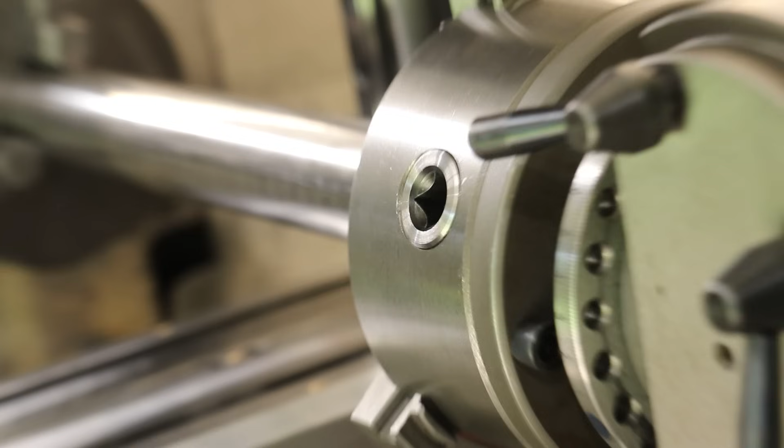So previously we made a dividing head attachment for the lathe. So this week let's put it and the vertical milling attachment to work. If you haven't seen the previous two videos, I've essentially replaced the tailstock with a dividing head. The goal here is simply to be able to hold parts in the lathe and also lock it in place and index it if necessary.

And after considering making some sort of spindle lock or dividing attachment, I thought the easiest, most simple way to do this was to replace the tailstock with the dividing head, which I already owned. All I had to do was make a bunch of standoffs to bring it up to the correct height.

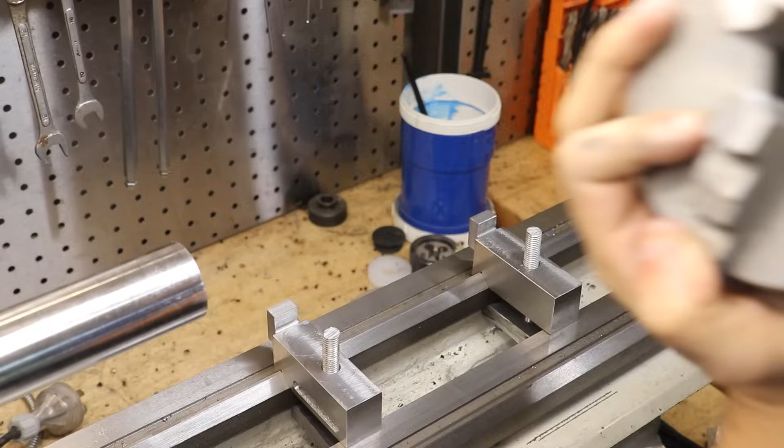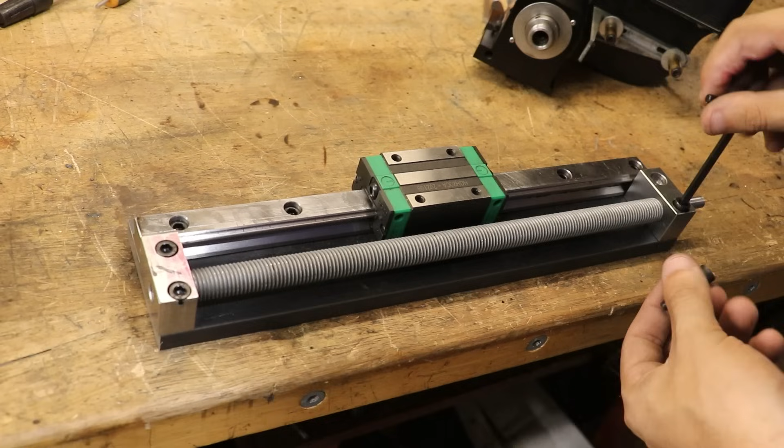The vertical milling attachment though is a bit of a different story. You'll see why this was necessary in a minute, but essentially all it is is just some threaded rod, a linear rail which I stole from an old CNC project, and a bunch of 1/2 inch metal plate which I've simply welded together and then bolted to the new cross slide.

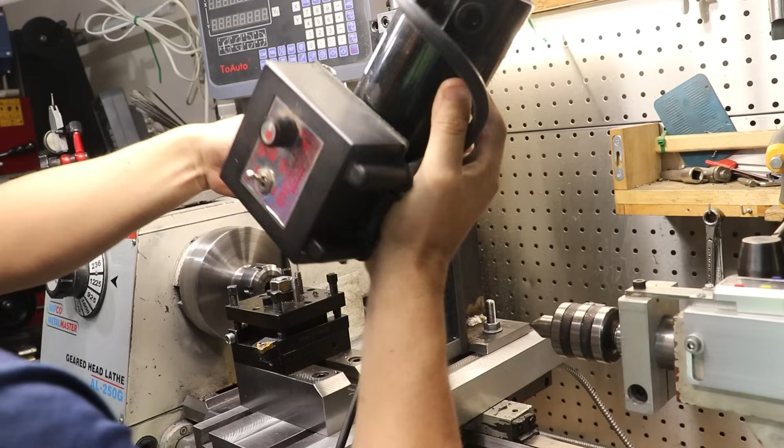It's not the most substantial piece of equipment that I've ever made, but given that it cost me almost nothing to make and this is a one-off job, it'll do the job just fine. So I guess at this point, let's talk about the reason why I've gone to the effort to make all of these things. And to do that, we need to go over to the mill.

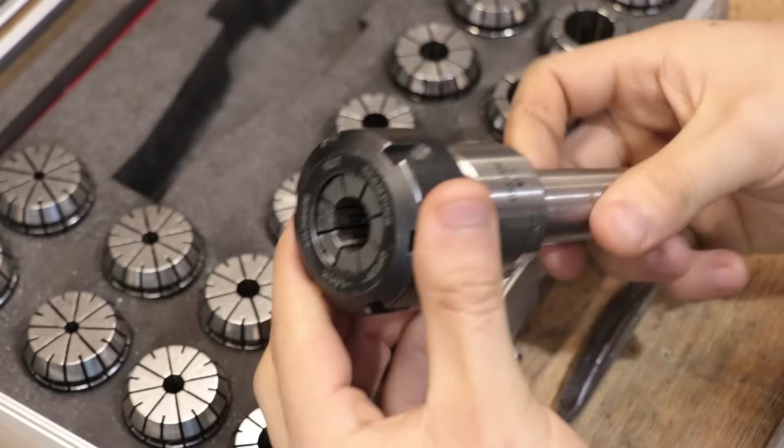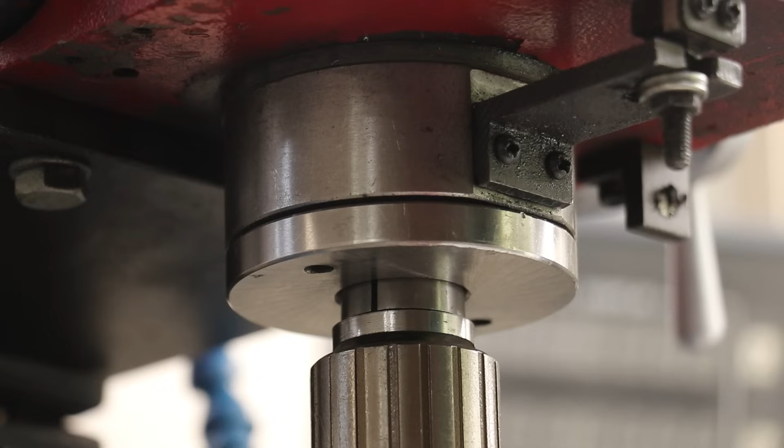Now something that I've said for the past 3 years is that one of the best things I did to this mill was stop using my Morse taper ER collet chuck and instead swap over to what I call the quick change mill tooling. Essentially they're just ER collets with a 20mm shank and they're all held in a 20mm Morse taper 3 collet. It just makes changing out tooling a lot easier and a lot quicker because all you have to do is change the tool holder rather than having to undo the nut, change out the collet and change out the tool. The upfront cost is a little bit more expensive, but it is well worth it.

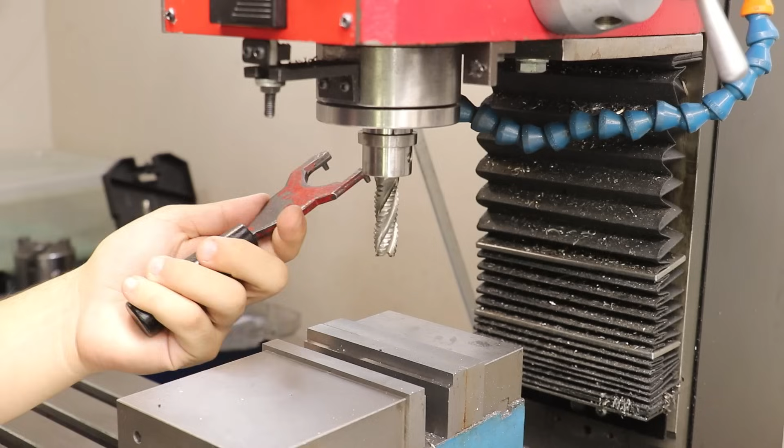Now whilst I do love this method of tool holding, the spindle wrench for holding the spindle in place whilst I undo the drawbar leaves a lot to be desired. Now I do want to point out that the method for holding the spindle whilst you undo the drawbar seems to vary a lot between different models and brands of milling machine. I've seen and used a few different designs, but by far the worst has got to be the one that they've used on this milling machine.

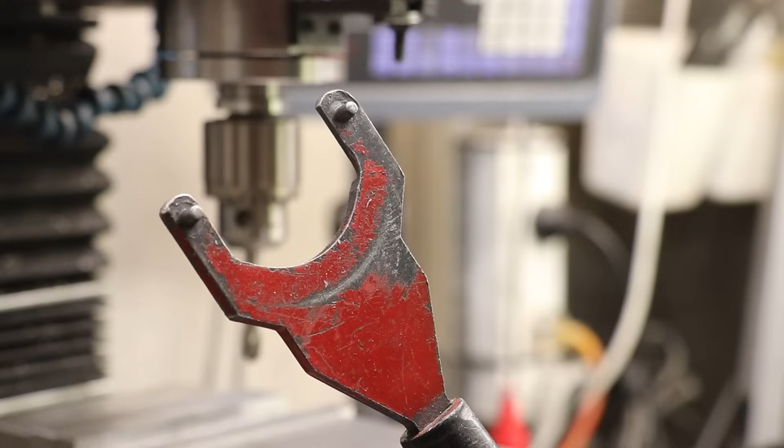Essentially you have a wrench with 2 pins that locks into 2 small holes on the bottom of the spindle and you use that to hold the spindle whilst you undo the drawbar. In theory it should work, but in practice there's so little room between the bottom of the spindle and the top of the flange, and there's so little engagement between the pins and the hole that it's very easy for the pins to slip out and for the wrench to slip.

And when that happens I can very easily hit my wrist on the tool. I can very easily graze my arm on the end mill depending on what type of holder, and I've also smacked my arm into the workpiece itself. Now I do want to stress that this isn't something that happens very often, but at the end of the day, this is just a numbers game.

You know, I change the tool in and out maybe 30 times in a good project, so times that out and maybe say I have a slip once every 200 or 300 changes. You know, that does start to add up over time. Again, I don't get hurt every time, but it's just a numbers game and something that I really wanted to fix for a very long time.

Now I think the most straightforward way of fixing this would be to add some sort of spindle lock. Essentially a pin that would locate into a hole on the spindle itself, and the spindle lock would be connected to either the milling head itself or the quill.

Now adding a spindle lock would not only make the mill a lot safer to use, it would also make using it a lot more enjoyable because it also means that I don't have to worry about finding the spindle wrench, because it seems to be one of those tools that I'm always losing. Now before I can add it though, I do need to get the mill pulled apart, just so I know exactly where the bearings are and how thick all the walls are, so I don't accidentally drill into anything too thin or too important.

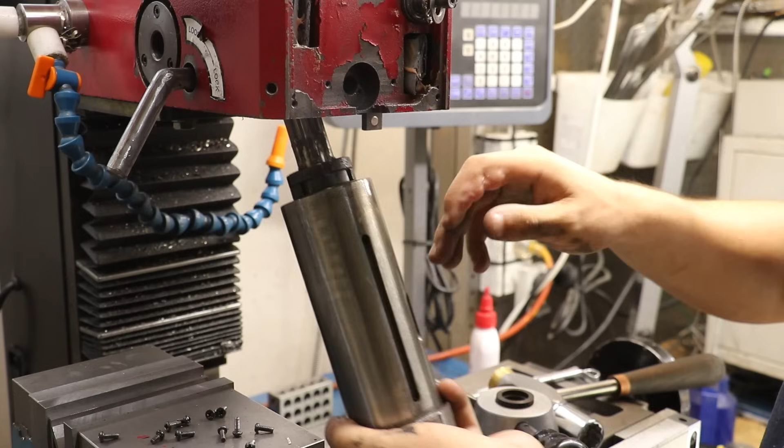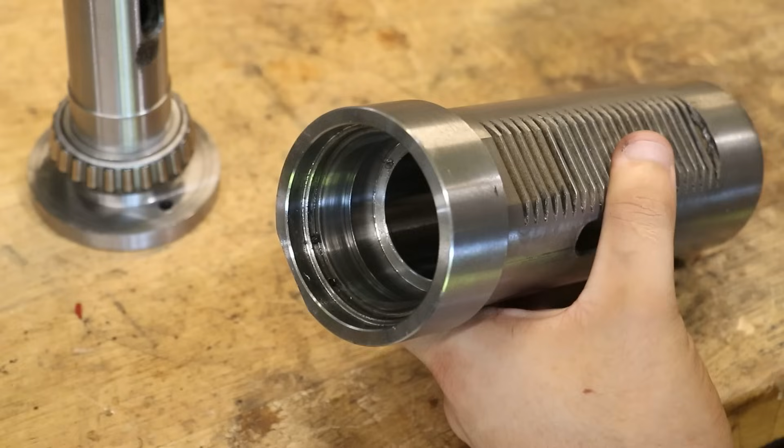Alright, so that's now the spindle and the quill pulled apart. Unfortunately though, the news is not good. I was under the impression that the bearings sat a lot further down in the quill than they actually do. It had been a while since I'd pulled the quill apart, so whilst I didn't exactly remember what it looked like down to the millimeter, I did remember the model of bearing that I'd used. So going off its height and the height of that bottom flange, I thought that I'd have about 15 or 10 millimeters of space to work with.

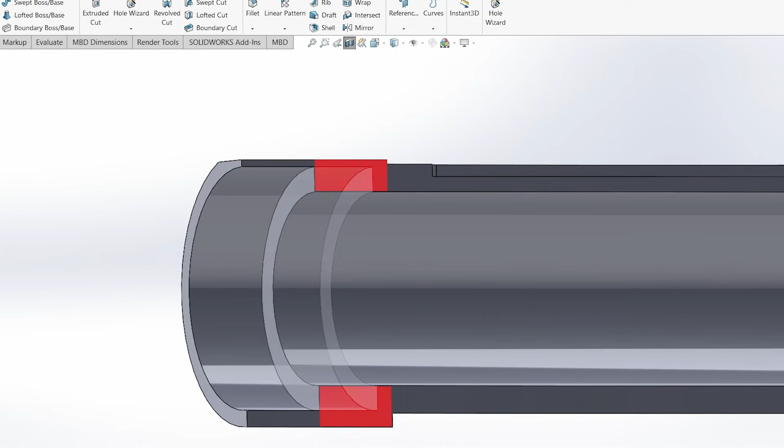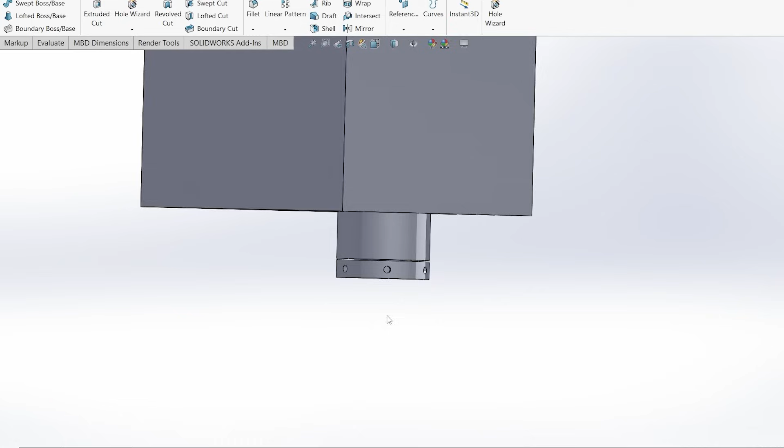Unfortunately, it sits a lot further back than I'd remembered, which means the amount of usable space that wasn't being taken up by the bearing was about 3 millimeters. Now yes, there was more space at the top to mount some sort of spindle lock, but I wouldn't be able to use it because I need that space at the bottom for the spindle lock body. The original design needed to be as low profile and as compact as possible because the pin needed to lock into that flange on the spindle, and it also couldn't be lower than the bottom of the spindle itself, otherwise it would risk crashing into workpieces. So unfortunately, at least as far as my first design went, that was the end of that.

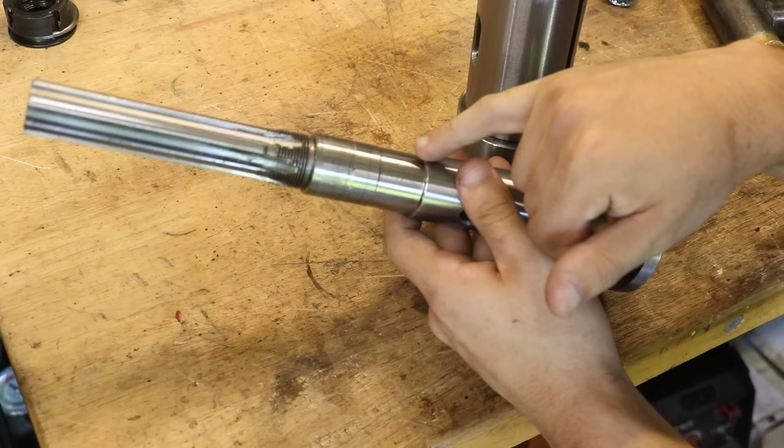Now after doing a bit of research online, I did find a few designs that use a pin that locates into a hole that's located closer to the center of the spindle. Now unfortunately, because I have a quill, it is going to complicate things a little bit because the quill also has to move upwards and downwards, which means I either cut a massive slot all the way down the side of the quill so I can use the spindle lock whenever I need to, or I can only use the spindle lock when the quill is fully retracted. Thankfully, I only use the quill when I'm drilling, and most of the time it is in the fully up position, so this shouldn't be a huge issue for me.

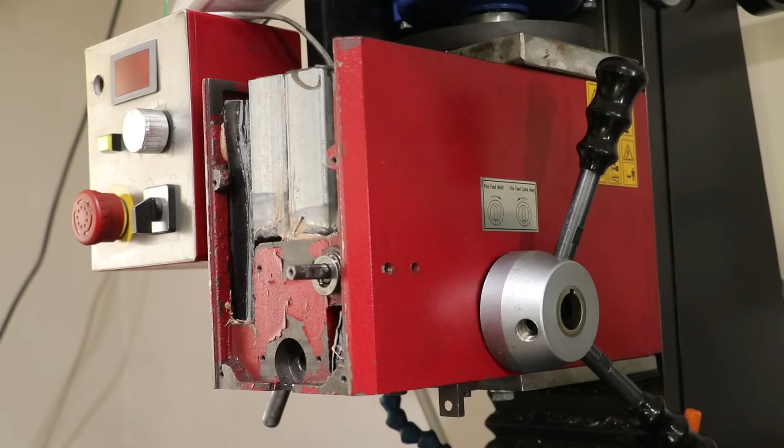So essentially what I'm planning on doing is having a spring-loaded pin that will go through the head of the mill, through a hole in the quill, and then lock into the spindle itself. Now that would be good, except at the moment, I don't currently have anywhere on the mill that I can install it. I can't really put it on the front because there is a really important alignment channel on the front that I don't want to interfere with, and I can't put it too far up because someone thought it was a great idea to install about 10 kilos of lead in the front of the head. I can't install it on the right hand side of the head because the handwheel for the quill is going to get in the way. I did think about remaking it with a different angle for the handles or maybe a different shape altogether, but I think there is a better way of doing this.

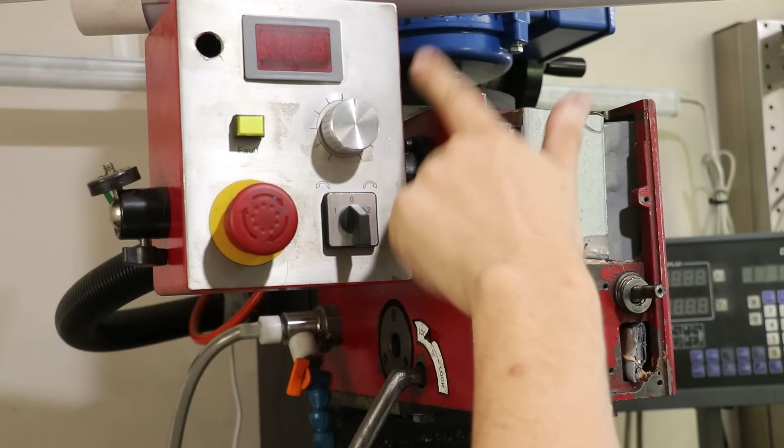Now unfortunately the left hand side isn't much better. There's the control box for the milling machine motor and also the handle for the quill lock. Funnily enough, there's probably even less space here than there is on the other side. But this is the side that I am going to choose because whilst I can't move the spindle lock location, I can very easily move the location for the motor control box. And by that I mean I'll just move it out of the way. It's only being held in by that plastic bracket, so I can easily remove that and just mount it somewhere else.

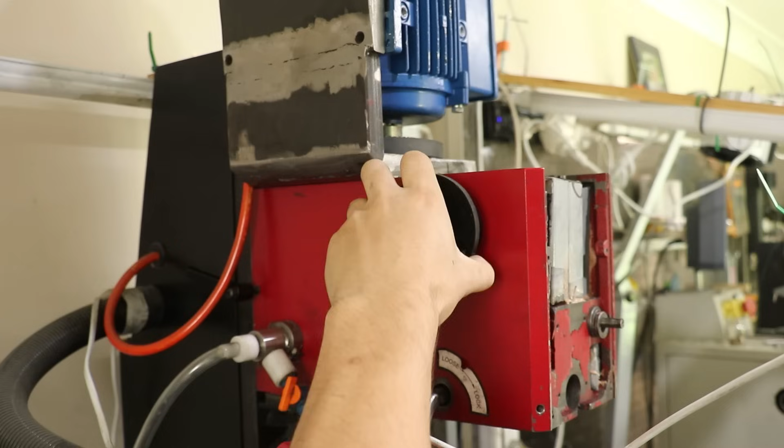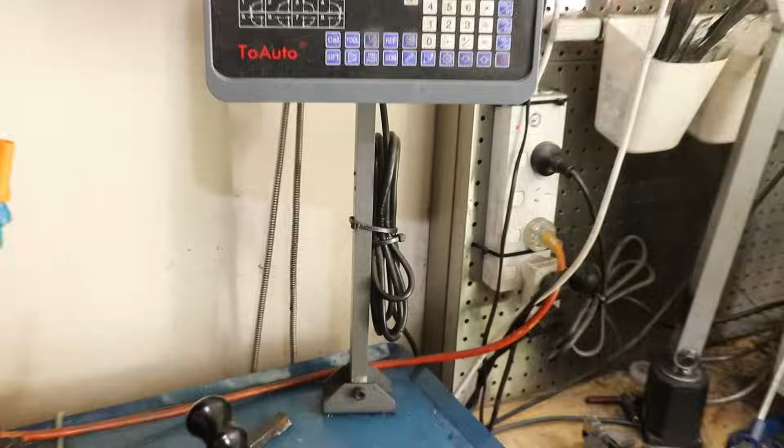So with it now removed, let's get it mounted somewhere else. I think the easiest way to do this is just to copy the arm and the mount that they use for the DRO. Essentially, I'll just make some sort of swing arm and mount it pretty much how they intended the DRO to be mounted in the first place. But instead of being a DRO, it's going to be a motor control housing. So the first thing I'll do is I'll quickly run up to Bunnings and grab a bracket and some aluminium extrusion, and hopefully try and make this work.

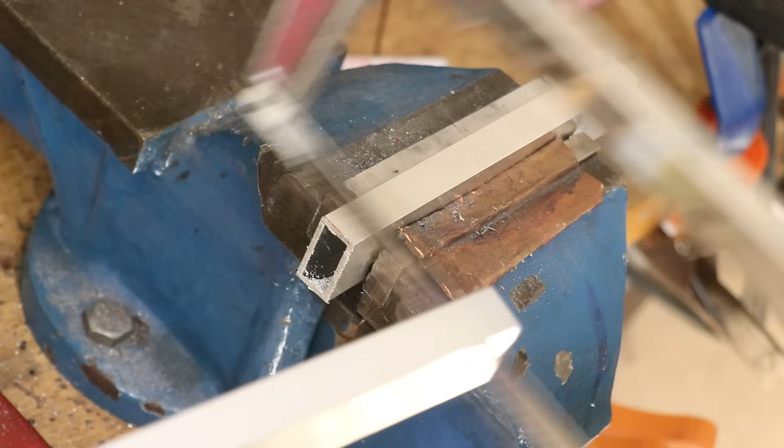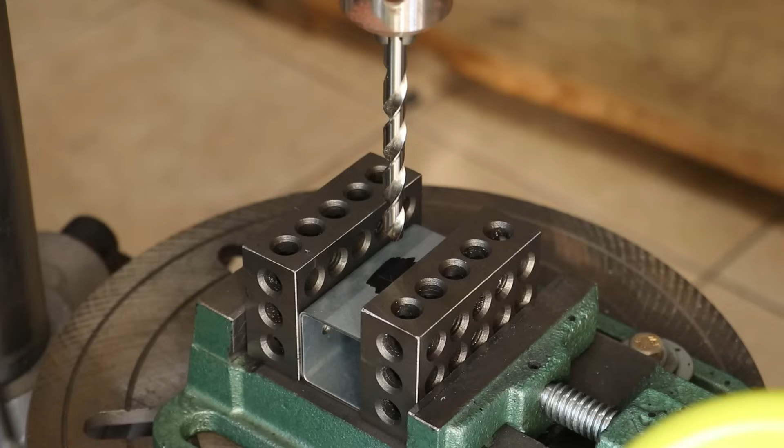Alright, so this is roughly what I'm aiming for, and hopefully this works. Now with the milling machine fully disassembled, I'm instead going to crack out the drill press and use it to do all the drilling.

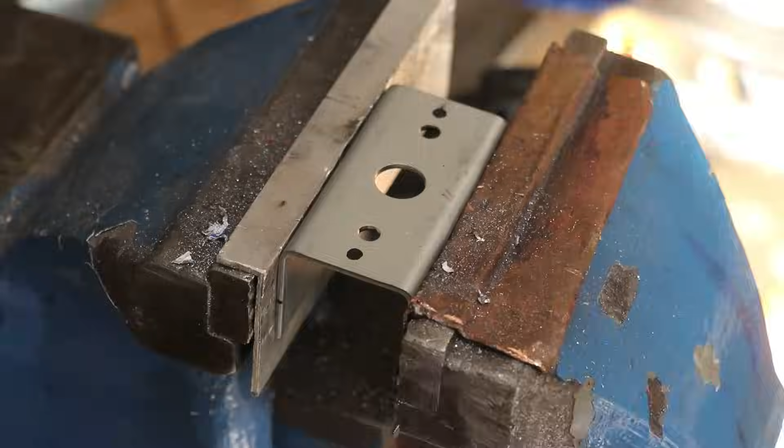I'm also going to drill 2 extra holes that will mount to the milling machine control box, and this will be so I can use the standard hole pattern to hold the bracket to the milling machine control box.

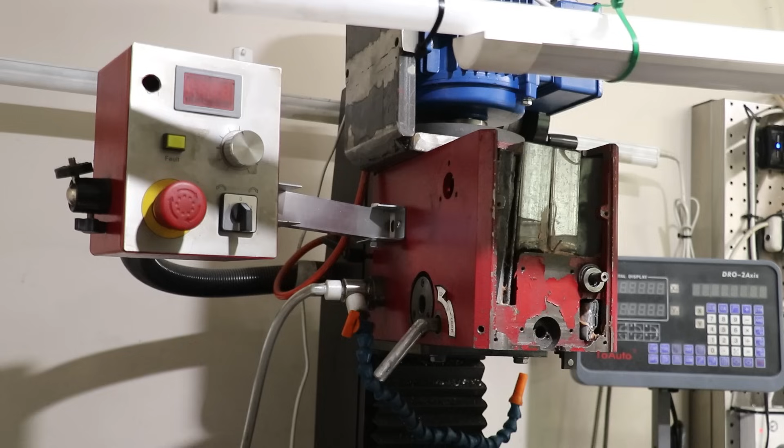Alright, and there you go. It looks a lot better than I thought it would. The important thing though is that it's opened up a lot of space above the quill lock.

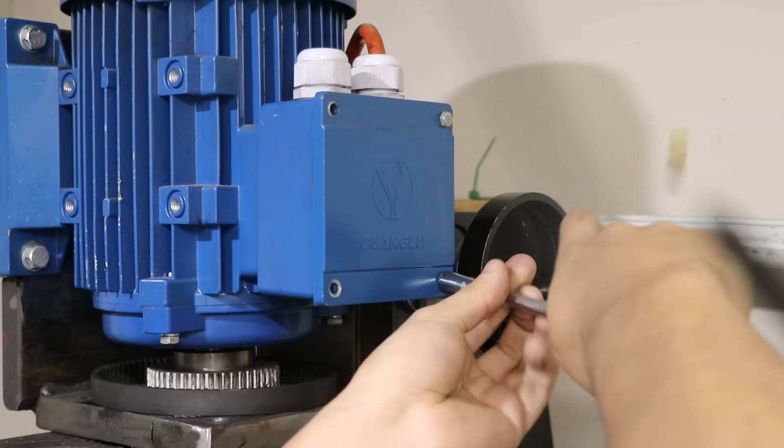So the next thing that I need to do is get the milling machine head ripped off. Now once upon a time, this was not a huge deal, I could do it very quickly, but considering that someone decided to shove 20 kilos of lead in the milling machine head and also put a 20 kilo motor on top of it, getting it removed was a pretty big job.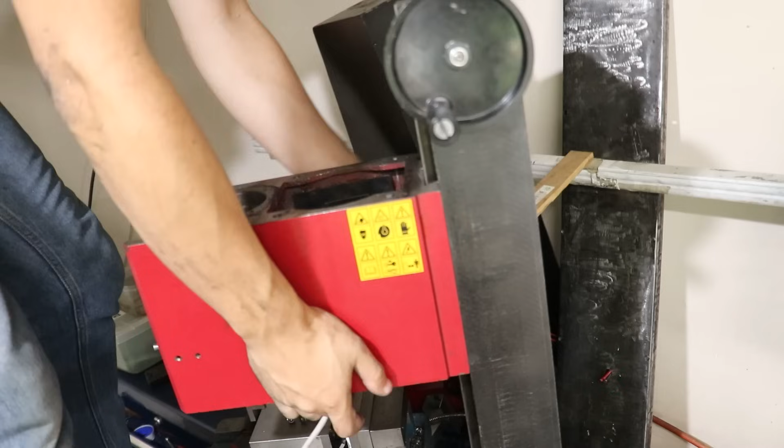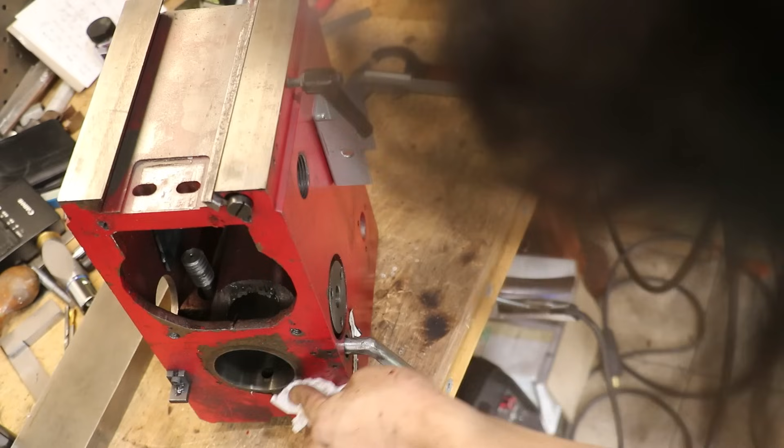Now the next thing to ask is where to go from here. What I need is to get a hole drilled through the side into the quill and pretty much dead center into the spindle itself. And all 4 holes need to be pretty much on size and they need to align pretty much perfectly. And unfortunately, trying to drill straight into a curved surface can be, at the best of times, pretty difficult. And of course, I can't use the milling machine to line everything up because the milling machine is disassembled. So here's the plan that I came up with.

I first put the quill back into the mill head. This is going to be without the spindle and you'll see why in a minute. I measured out and marked to the best of my ability the center line of the spindle. I'll now take it over to the drill press to do all the drilling.

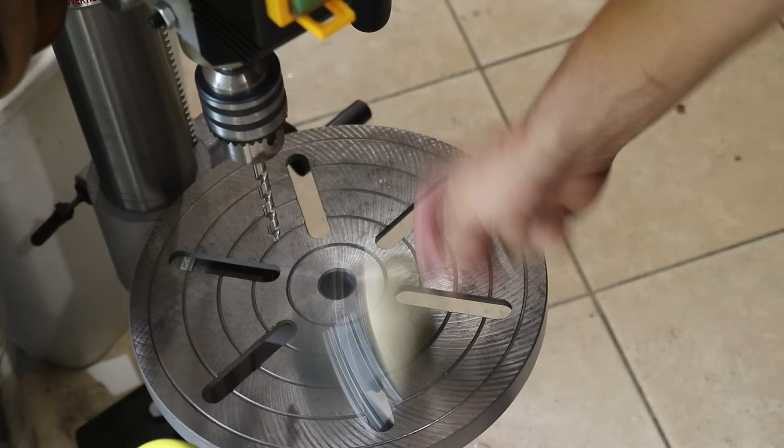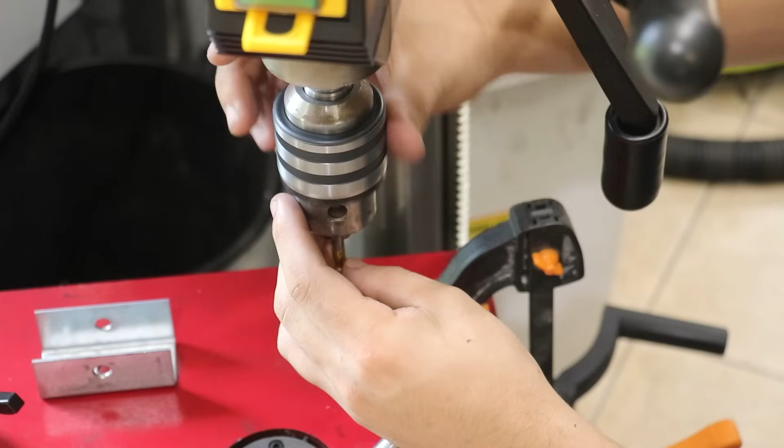Now instead of using a twist drill, which isn't very strong and isn't very stable, I'm instead going to do most of the drilling, or at least as much drilling as I can, using a center bit. It's going to be a lot stronger and hopefully a lot more positionally accurate than a twist drill.

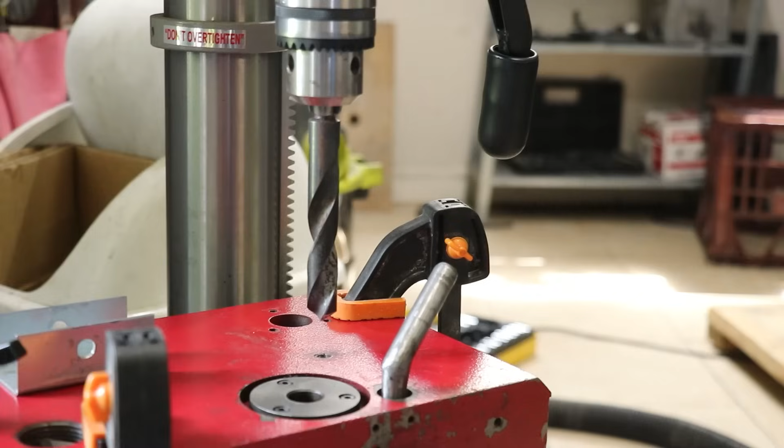Now unfortunately the center bit is not very long, but it was long enough to at least start that second hole. I'll then switch over to a twist drill and finish off the hole. I'll then open up that first hole with a Deming bit, and this means I can have a little bit of play for alignment later on.

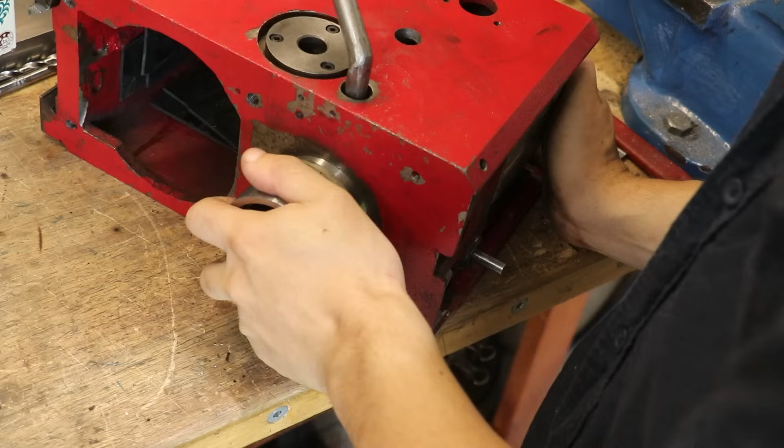Alright, so far so good. I think those holes have come out looking really clean. For a little bit, I was a bit concerned that it was going to put up a struggle because the spindle and the quill are hardened and tempered to the low 40s Rockwell C hardness. By no means is that super hard, but it did put up a bit more of a fight compared to a normal unhardened steel. Now the next thing that I need to do is get the milling machine spindle reassembled, and you'll see why in a second.

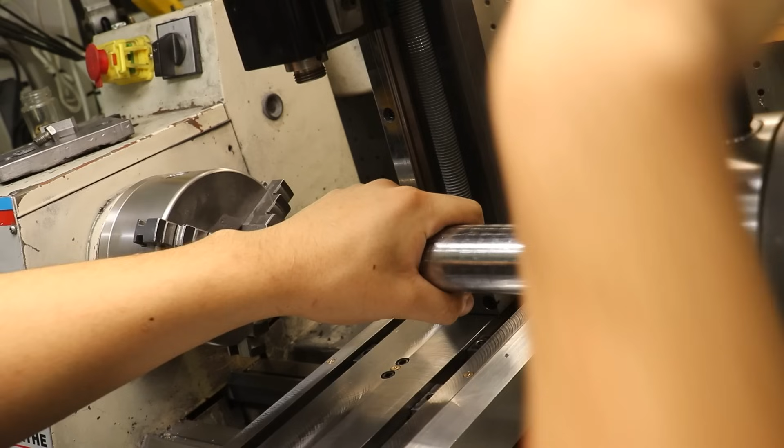And we can now finally take it over to the lathe and finally get some good use out of both the dividing head attachment and the vertical milling attachment. If it isn't already obvious, I can't use the disassembled milling machine to make modifications to the milling machine, hence why all these attachments were necessary. I also couldn't do this step with the milling machine spindle assembled in the drill press earlier, because the milling machine spindle needs to be completely locked, and as you'll see in a little bit, I also need to index it.

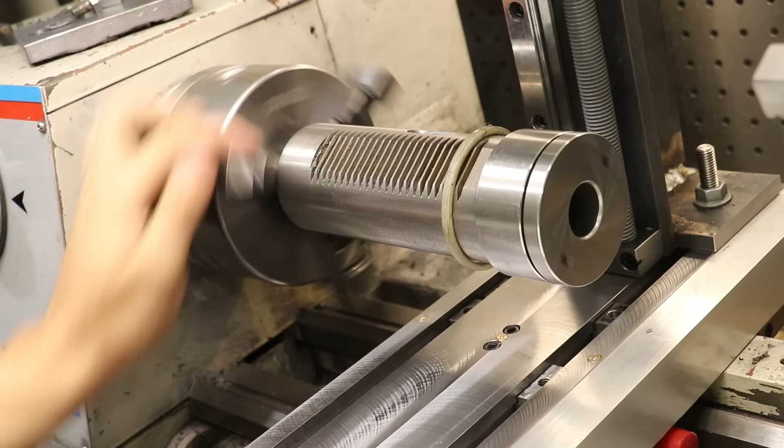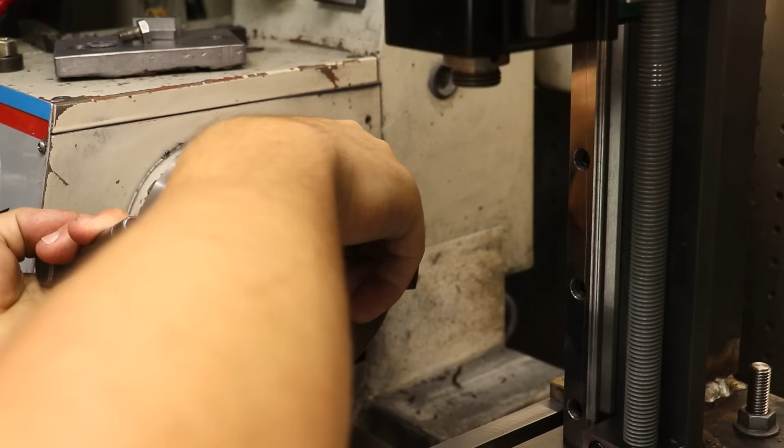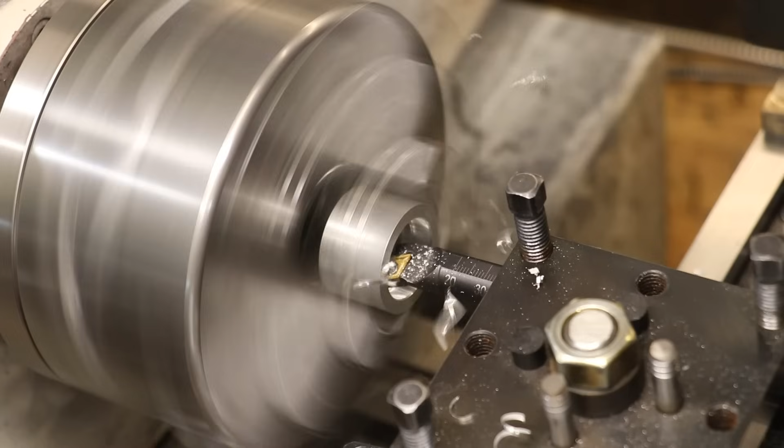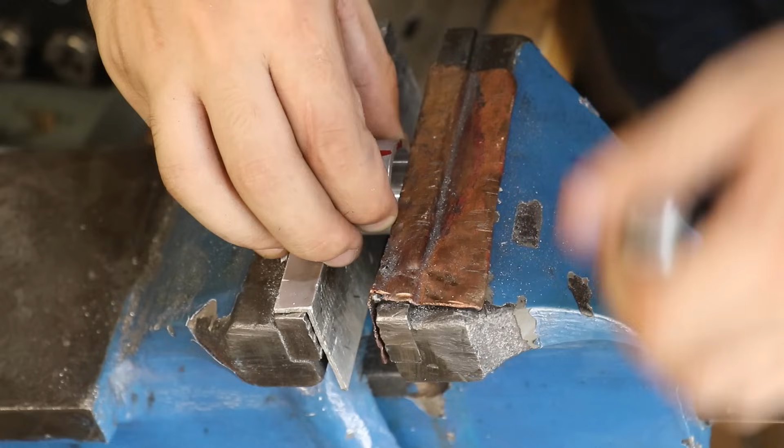However, before I can go any further, I am going to need to make a few modifications, because as it is at the moment, I'm currently clamping on that locking nut, and not the spindle itself. The lathe jaws just aren't long enough. And as you can probably imagine, that amount of run out just isn't acceptable for this type of job. So what I'll do is take a piece of scrap aluminium and then bore out the center, until the center is the same size as the spline shaft. I'll then cut out a section to make it a clamping ring. And thankfully the run out is now a lot better than it was before.

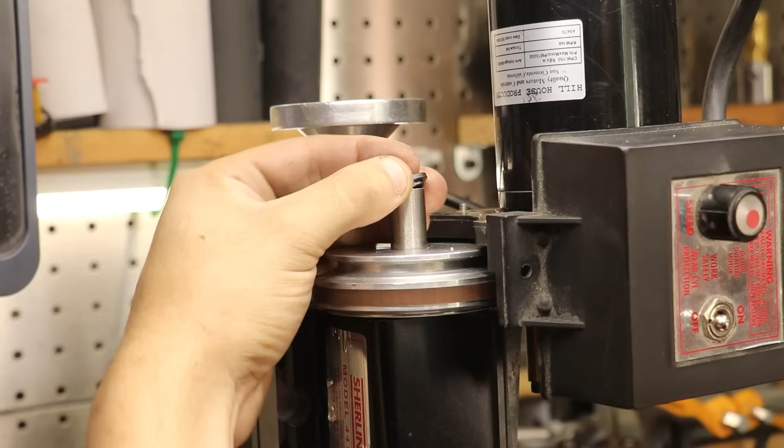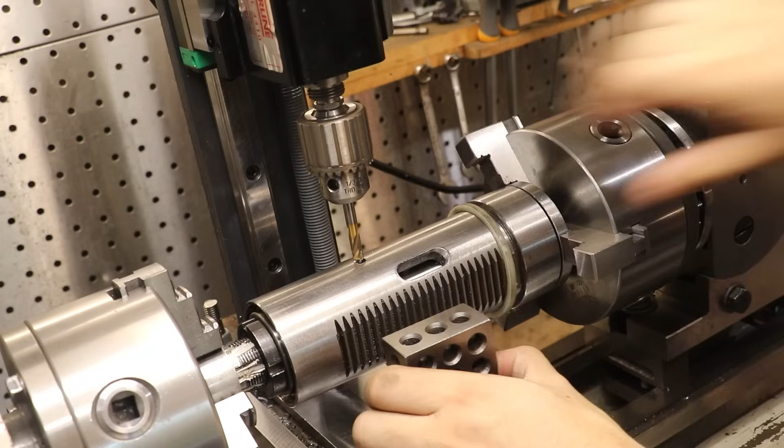Now what I'm going to do here is use the hole that we drilled earlier to align the drill bit for drilling the final hole. It shouldn't be too difficult because I know that hole should be perfectly perpendicular to the gear rack, so I can simply use a 1-2-3 block to make it perpendicular to the surface of the cross slide.

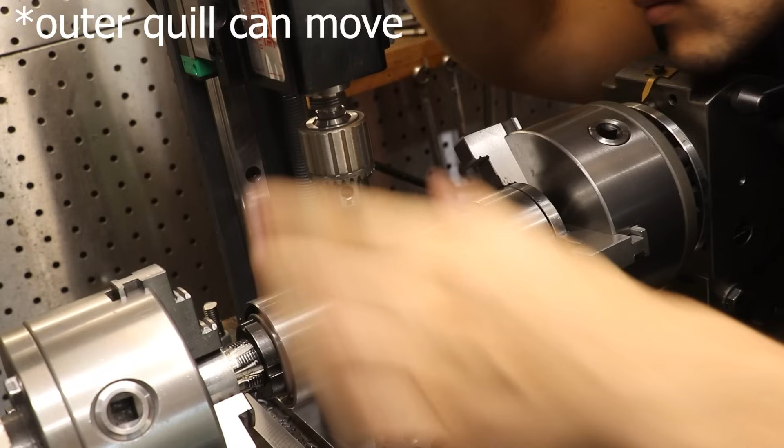With that now done and everything now locked in place, I'll use the spotting drill to mark out the location of the hole. Now I'm not going to be able to drill the hole all the way through because the outer quill is still free to move, so I'll have to remove the assembly and get the spindle removed, remount it, and then use that marking to line up the drill bit for the final time. I'll now start to drill the hole.

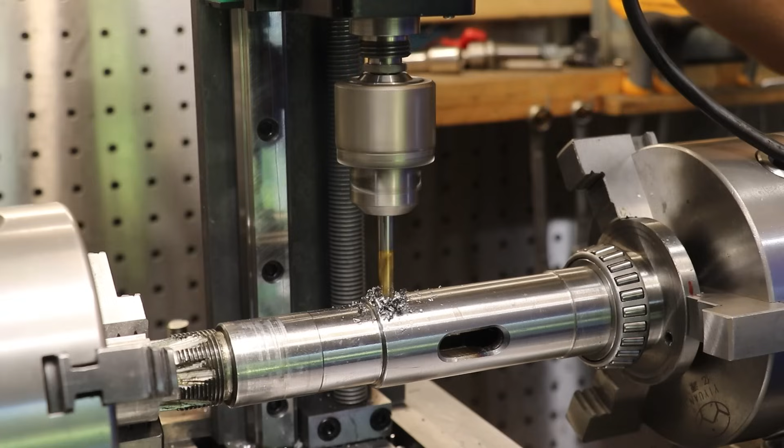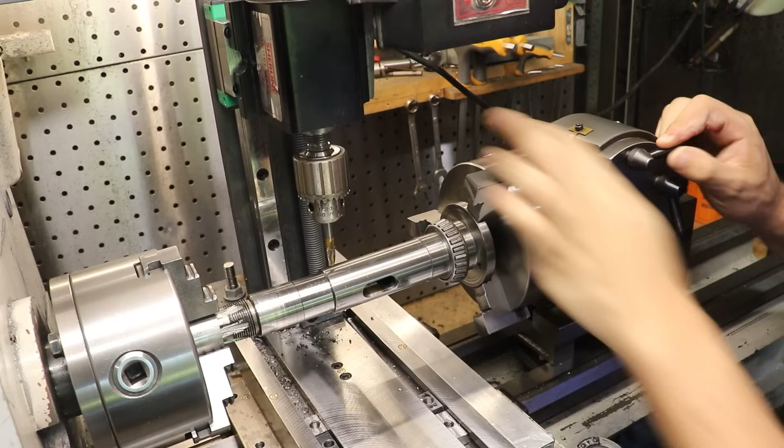And with the hole now drilled, I'll now flip it and then drill the hole on the other side. Now originally I was going to drill 4 holes, but because I don't want to weaken the spindle any more than I am, I'm simply going to leave it as 2 holes. Alright, and that's the 2 holes now drilled.

If you're wondering about the exposed bearing over there at the end, I am taking this as a good opportunity to replace both the top and the bottom bearings. I wouldn't worry about dust or chips getting in there because they're both being replaced.

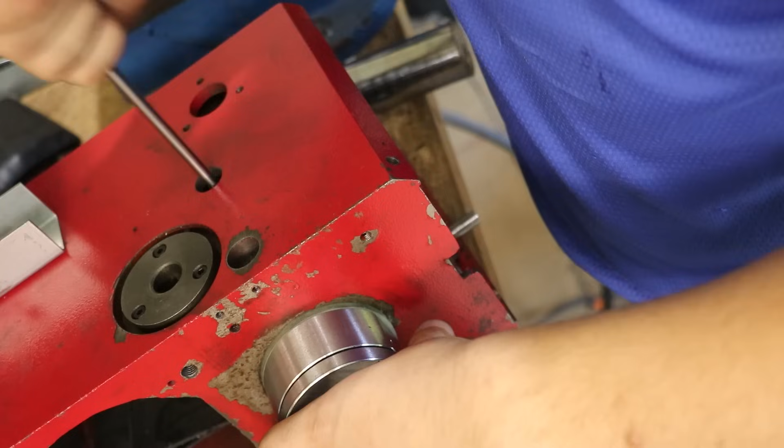And with it now reassembled, it's now the moment of truth. I have some 6mm drill rod which I am going to use as the locking pin. And thankfully all the holes perfectly line up. Once I get it back in the mill head, it still lines up pretty much perfectly. So I guess so far, nothing's gone wrong. So with it now working so far, I'll now start to get it all reassembled.

Alright, the final thing left to do is make a spring-loaded pin with a handle. And really, there's no need to overcomplicate this. I'll start off with a piece of 1045 steel and I'll drill a hole all the way through it. I'll then attach it to an arbor and then clean up the outside. I'll then get it in the mill and drill some counterbore holes for some M4 cap head screws.

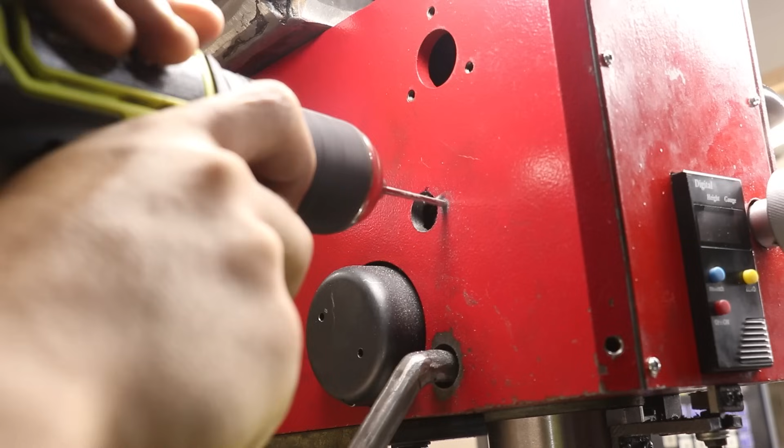I'll now drill and tap some matching holes on the side of the milling machine. And thankfully with it now mounted, everything still perfectly lines up. I can now mark out the stroke length for the pin. When it's fully retracted, it can't engage either the quill or the spindle. And when it's fully pushed in, it needs to lock the spindle.

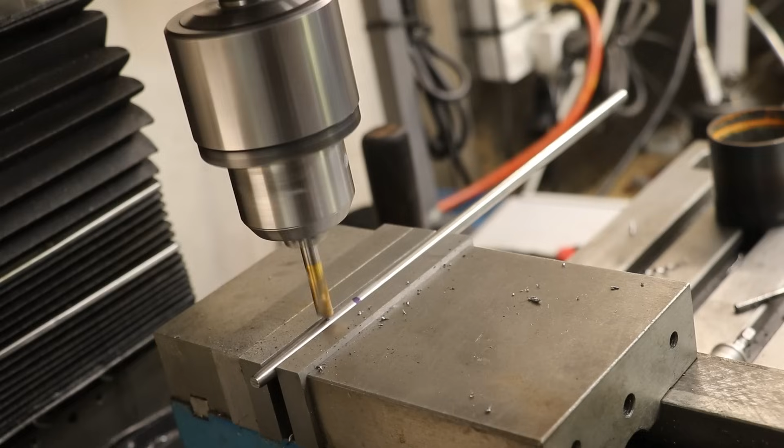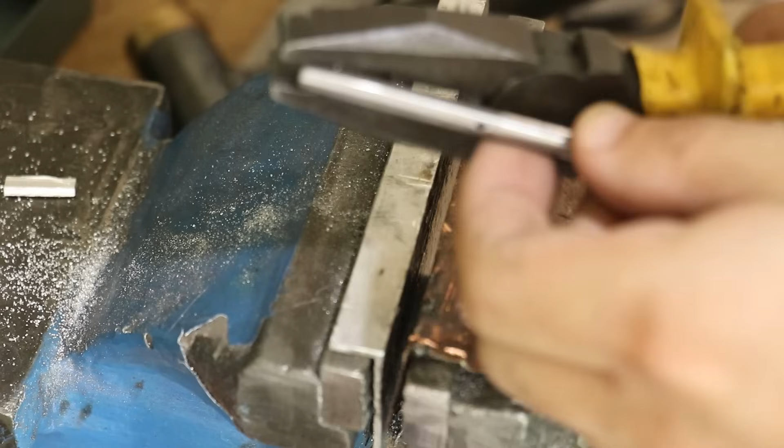Now to stop the spring from simply shooting the pin out, I'll drill a small hole and then mount a smaller pin in the center of the pin. And by pin, I simply mean I'm going to use a nail. Now off camera, I did taper off the end just to help it engage in the hole just a little bit easier. If my maths is correct, it shouldn't be engaging on that taper at all.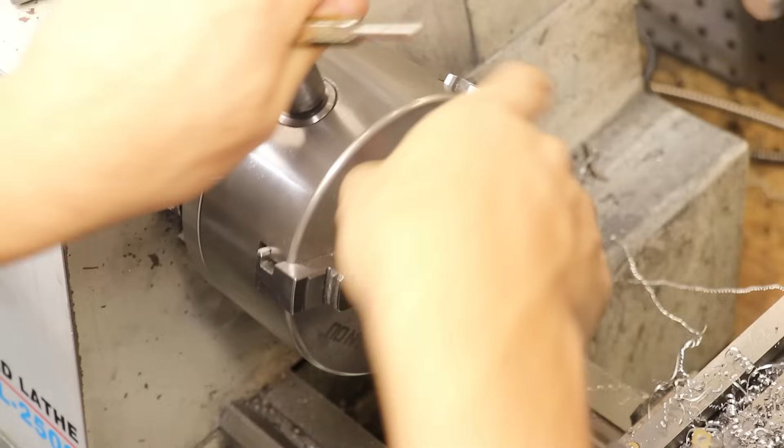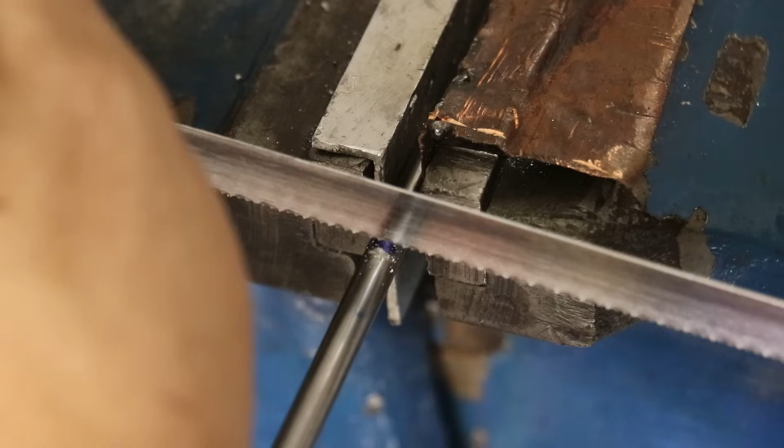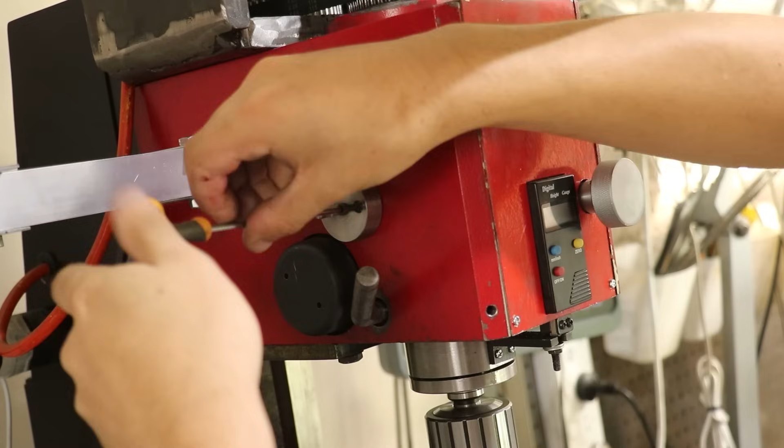The final thing I'll do is I'll take a piece of scrap aluminium and I'll make a handle to go on the end. And on the first go, it seems to be working pretty well.

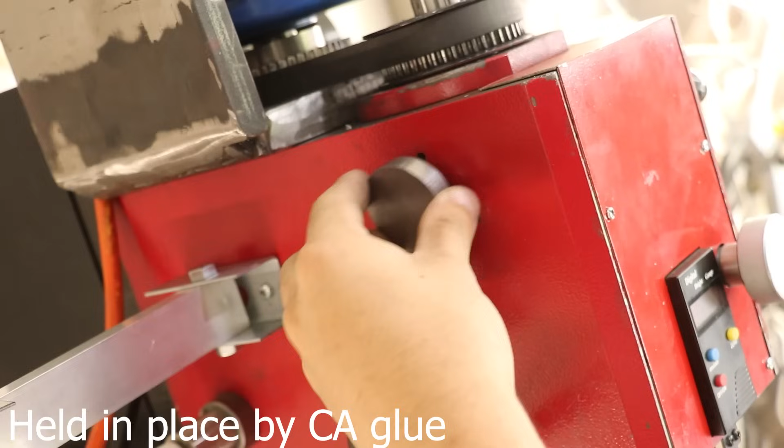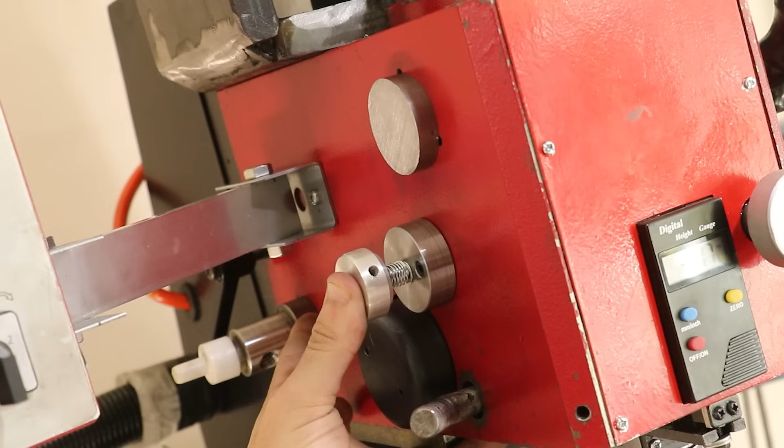Now back at the lathe, I'll use a piece of scrap steel just to make up a plug that will go in that hole that was left by the bracket that held the motor housing to the mill. And with everything now perfectly adjusted, the mill spindle lock works pretty much perfectly. It slides in with very little resistance and it does a fantastic job at locking the spindle. And it's making my job of doing up and then undoing the drawbar so much easier.

Honestly, I wish I'd done this a long time ago, and having only used it for a little bit, I can easily tell that this is going to be one of the best upgrades that I've made to the milling machine. All in all, I am really happy with this upgrade. The only thing that I do need to worry about, that I didn't have to worry about before, is that I need to make sure that I'm not engaging the spindle lock when I'm hammering on the drawbar to release the tool. It's not so much about denting the pin, it's more about preventing denting or damage on the spindle itself.

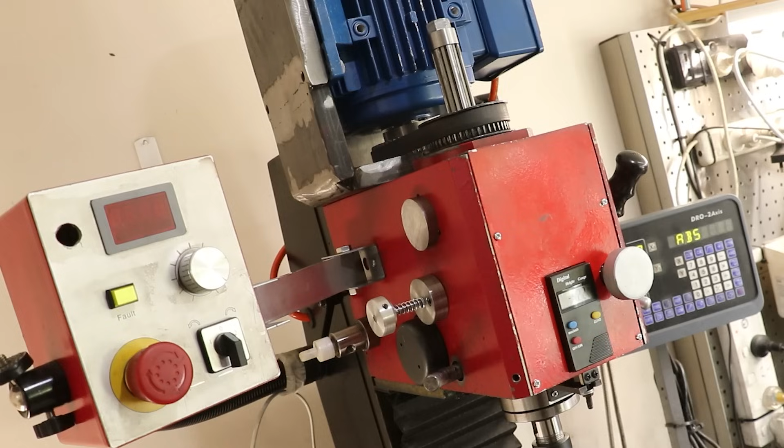So I think some sort of captive drawbar is going to be on the table at least sometime in the future. I'm not exactly sure about that yet, because I think to make a proper captive drawbar, it's going to require extensive modifications to the top of the spindle, at least on this design of spindle that I'm using. The opening of the spindle is a bit different to other spindles that use a captive drawbar, so before I do that, I need to think of a design that will work here.

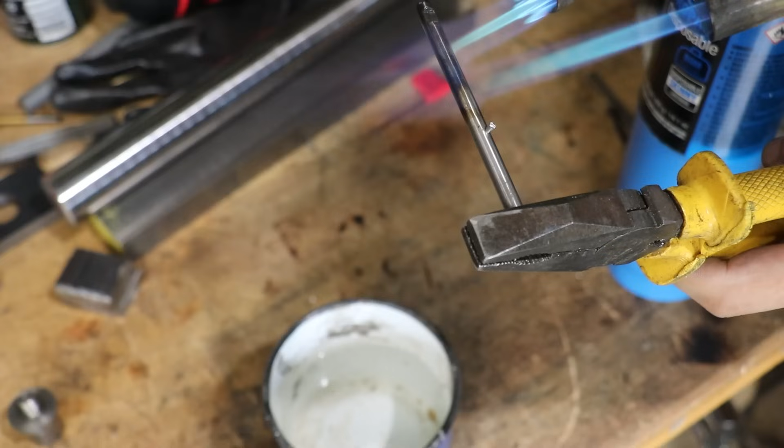Now the final thing that I want to say is that after a few days of using this, I did make 2 further modifications to this design. The first thing I did was I hardened up the piece of pin that was going through that steel housing. The steel hole was rubbing up against the pin and starting to cut up that section. The pin was made from drill rod and hardening it was very easy. And thankfully, with the pin hardened, there was no further problems.

The final thing I did was blued up the plug just to make it blend in a little bit better. Outside of that, the spindle lock has been working with pretty much no issues at all. All in all, I am so happy with the upgrade, and it is easily one of the best upgrades that I've ever made.